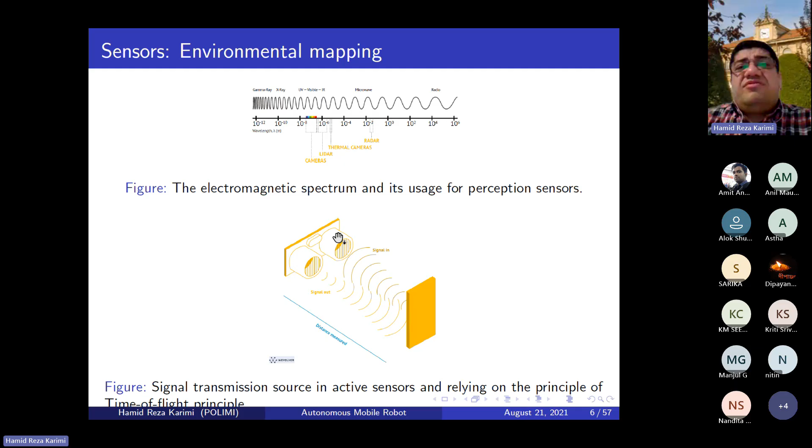But this could be the same active sensor. You can see that the sensor can send out a signal, like an electromagnetic signal, and after hitting a barrier, the signal can be reflected back to the source. This kind of transmission of the signal, you can calculate one parameter which is time of flight, the TOF principle.

It's one of the key parameters for the active sensor, in order to calculate the distance from the object. If the landmark or this point can be detected, the distance can be detected, and then the car can consider it to avoid any collision. Therefore this active sensor principle works in such a way.

So sensing the data is the main issue we have in this kind of large scale system, because in autonomous cars, the environment may be partly or even fully unknown, and the environment is dynamic. In this unknown or dynamic environment, it's very important to simultaneously build a map of the environment, and also for the robot or car to localize itself within the map. So environment mapping and localization is an important aspect for autonomous cars.

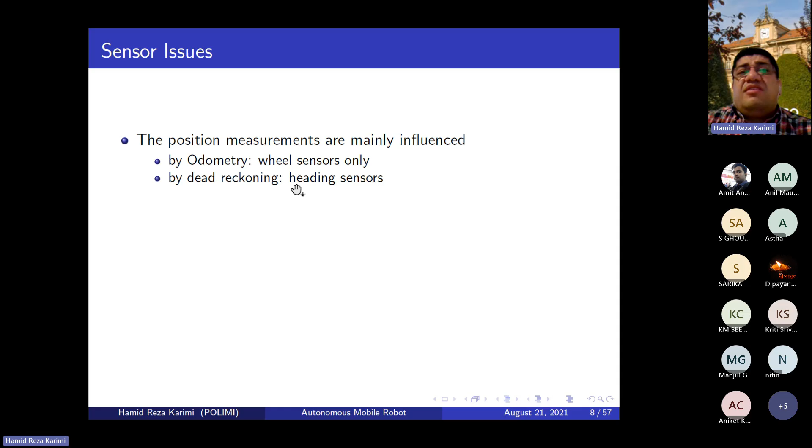It means you can get the position data from the wheel sensors, which is the odometry data information, or you can use dead reckoning. Dead reckoning means you can use some heading sensors, or you can combine the odometry and the reckoning sensors.

So the movement of the robot, because of this movement, first we can get some data from the wheels based on encoder data, and you can also use data from the heading sensors. This heading sensor information is useful for the rotation. So now you have a position, and also other information such as the heading sensors, and then you can combine or integrate it for the position estimation.

So this approach, using data from the wheels, is very straightforward and easy. But the problem is that the wheel sensor data for cars could have errors in the calculation, and could become unbounded if there are some attacks on the sensor data from the wheel.

So for vehicles and robots, if you are using sensor data from the wheels for control and positioning, if there is some cybersecurity attack, the result is not accurate, and you cannot even get a basic estimation of the position of the car.

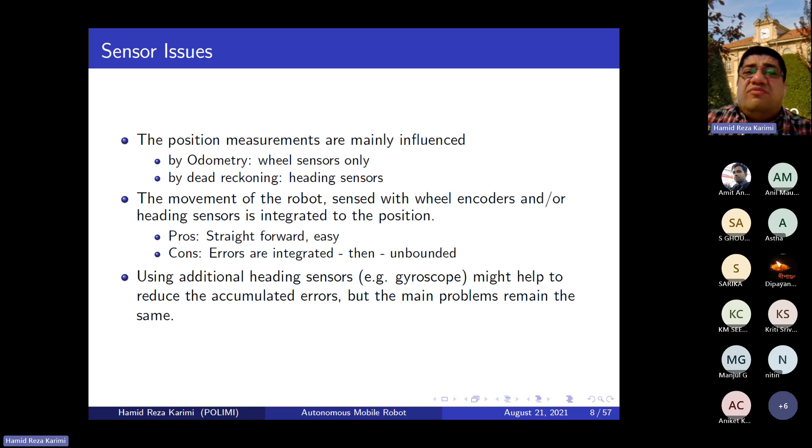In this scenario, there are some errors in your calculations. The error source could be deterministic errors, which can be eliminated by calibration - if you do sensor calibration, you can remove deterministic errors. But what about non-deterministic errors? These could also be described by error in the modeling, and always give some uncertain estimation. So these are two types of error in this modeling.

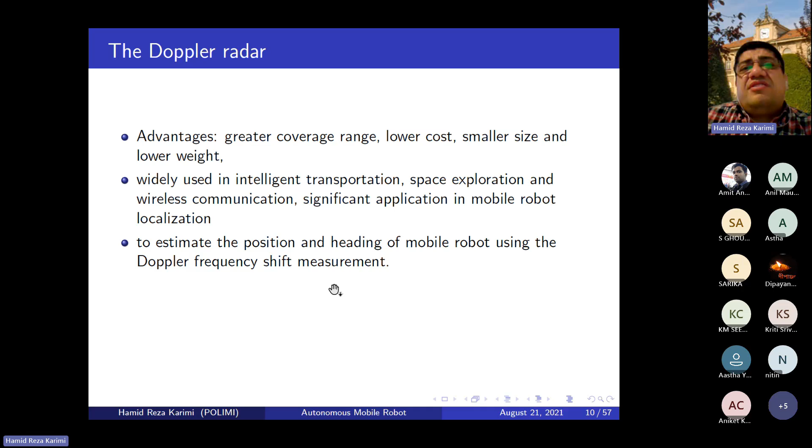We can use a Doppler radar sensor for the estimation of position and also the heading of the mobile robot, using the Doppler frequency shift measurement information. This is basically the information you can get from the Doppler radar sensors. And this information you can combine with feature-based mapping using landmarks and the Doppler radar. You can do some extended Kalman filtering, and also there are some other filtering techniques. So now you can see you can use some advanced estimation based on the information from the Doppler radar sensors, combined with feature-based mapping you have obtained, and based on some other techniques.

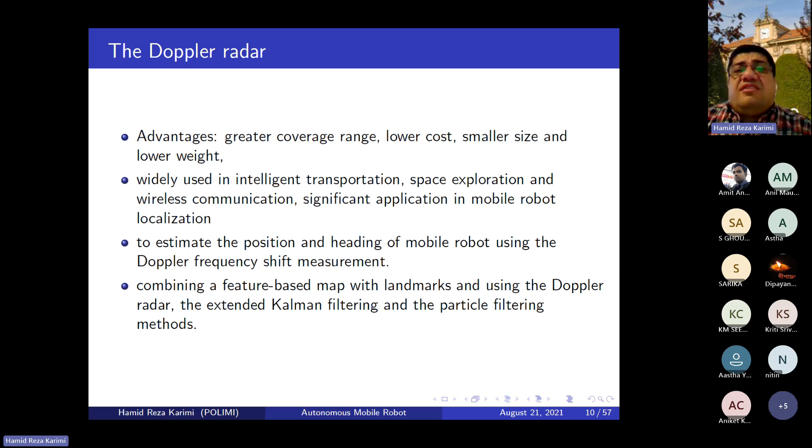Okay, so after this introduction, I want to talk about localization based on measurement outlier resistance on the network. These outliers include, for example, the fault - if the sensor is faulty, as we discussed yesterday about faults in sensors. It could also be attacks. So the outlier could be both. And the design should be resistant - resistance is the topic of the lecture from the first day. If you remember, we discussed resilient control and the CPS, the cyber physical system should be resilient. So resistance means resilient. Outlier means attacks - it could be, for example, a fault, all related to the data, the measurement. So now you can see this sentence is a topic that covers what we are discussing up to now in this course.

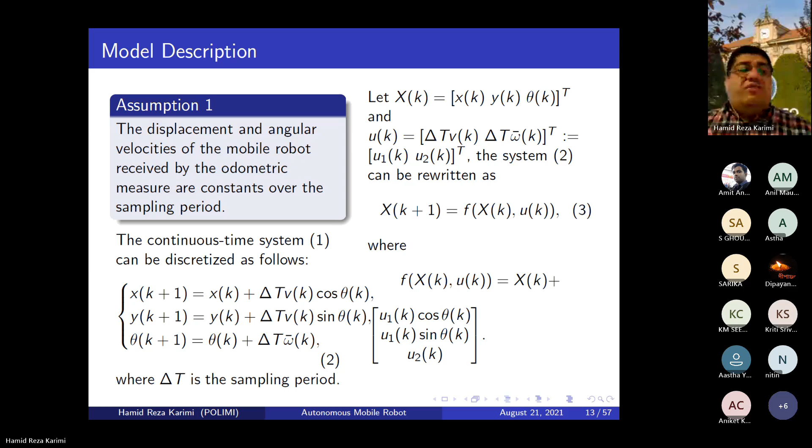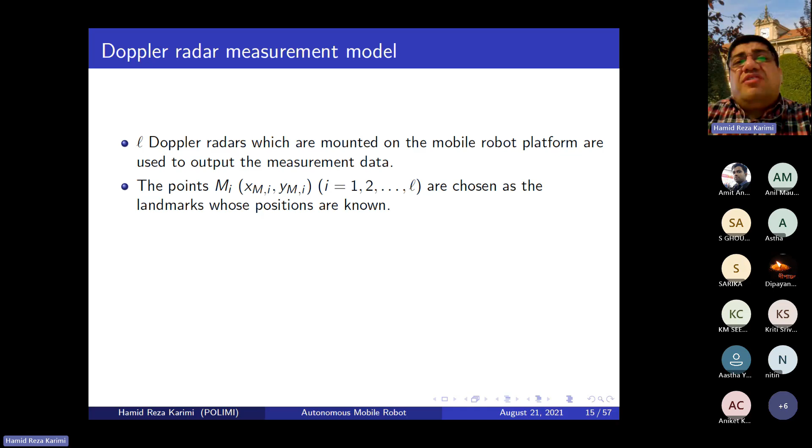Based on this information, the sensor obtains the position relative to the landmarks, and the robot starts to find its own position. So now you have sensors, and you have landmarks.

So now you need to know what the data you get from the radar sensors is. The radar sensor gives you the Doppler frequency shift data. For sensor number I, they give you the Doppler frequency shift and also the azimuth information. So these are the two data you can get from each sensor.

So if you want to see from the mathematics, at the time instant k, you have a measured Doppler frequency shift, B_ik, and also the azimuth information phi_ik. So these two, the information from the landmark I, we call the measurement.

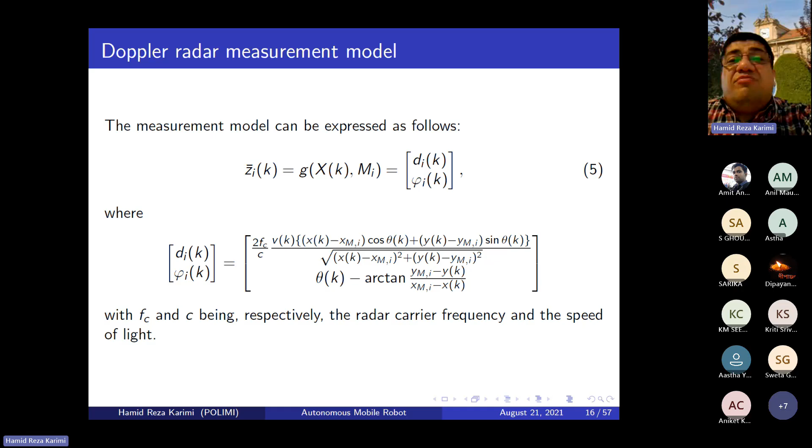I want to tell you a little bit more about the sensor data. The sensor data is a nonlinear function g, so you can approximate it like this. If you write down the sensor data like a linear term based on the Taylor series expansion, you can find this error xi_ik, and this is a linear part.

The matrix C_ik, you can calculate it from this Taylor series expansion. You take all the derivatives with respect to X, Y, and theta. This is a Jacobian matrix at the estimated xk, x hat k. If you calculate this partial derivative, I have written here all the partial derivatives. There is a lot of formulation.

And then you have your sensor data. Now this is a problem: measurement outliers. Measurement outliers in cybersecurity is a first problem, because in practical application, if there is a sudden environment change, or a sensor fault, or a cyber attack, this outlier can be produced.

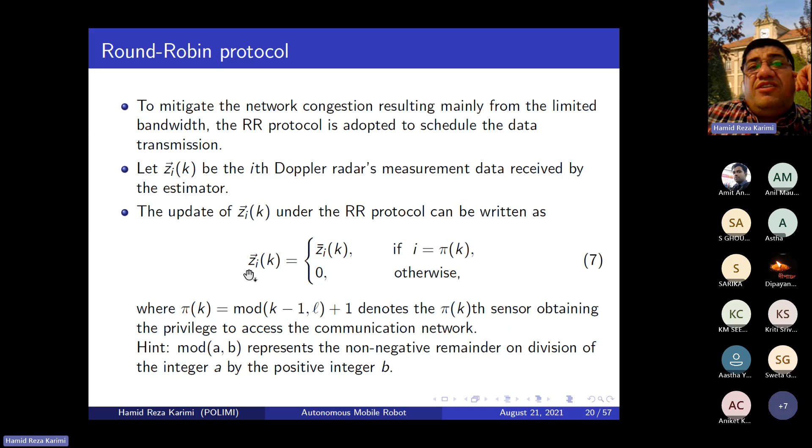So now, based on equation number 7, you have particular data at the estimator, and this data can be used for estimation. So now you have two data.

One is Z bar K—these are the data at the sensor. Z arrow K is the sensor data at the estimator.

Based on these two particular pieces of information, based on this network protocol, you can write equation number 8. Equation number 8 says what is the relation between the sensor data at the estimator received by the estimator—it has such a formulation with respect to the sensor data and the data at the sensor level. So here there is such a function, phi arrow pi k.

So this is a function, and if you write it like this, you can see that this network is very important because it affects the data you can receive at the estimator.

At the same time, this matrix, phi arrow pi k, can be represented based on this diagonal matrix term, and also this term—as you noticed before, xi arrow K—represents the error in your estimation. So now I'm talking more about this part.

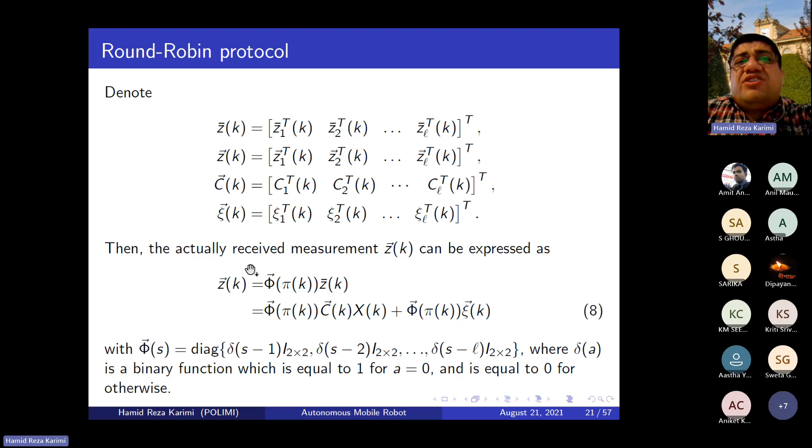This is a mathematical model for the actual received data measurement at the estimator. In equation 8, we can see that ZIK is a useful measurement data to determine the desired estimator, and the other measurements are equal to zero.

So equation number 8 increases the dimension of the measurement data, and there is a lot of computational complexity. So this equation has some drawbacks in terms of computational complexity in the real-time mobile robot.

Okay, so if you want to reduce the computational complexity, you can follow equation number 9. In equation 9, there could be some sort of representation. Based on this, we find the relation zk equals ck xk plus T psi k, and ck has such a representation. This means you can include the information of the network in your two metrics C and the function xi, and therefore equation 9 can be simplified in this form.

Now we need to introduce our estimator, for the mobile robot localization problem under the RR protocol, this is equation 10. Equation 10 is a nonlinear estimator. Why? Because x hat k plus 1 is ak x hat k, it is time varying. And if you look at the right side, here is LK multiplied by the saturation of sigma k, zk minus z hat k. This is very important.

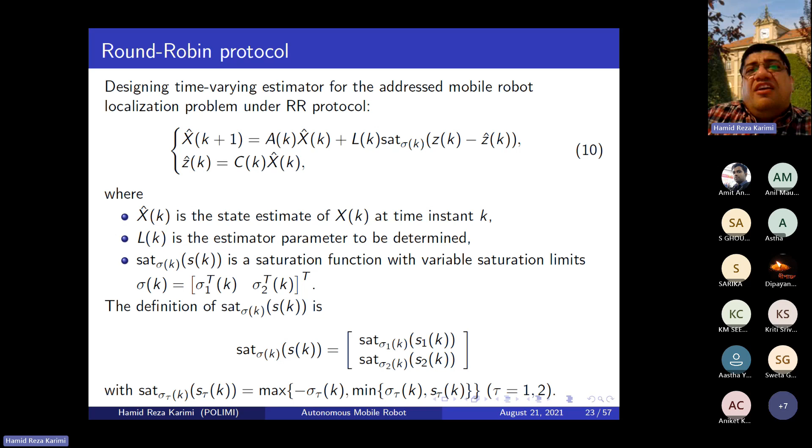Here again, sigma k, as I told you, is a variable saturation limit. It can be introduced like this. Sigma tau k comes from this mathematical formulation, but please pay attention that sigma is time varying, and this sigma bar k is time varying. It has dynamics like equation 12. It means that sigma bar k plus 1 is lambda k sigma bar k plus this information. Now you can notice that this limit is time varying, and depends on your data.

If zk minus z hat k gives you some outliers like attacks, then sigma k can be updated. Of course there are some metrics like rk or lambda k, and these two parameters you can choose by yourself. By choosing these parameters, you can tune sigma bar k in order to protect your estimation.

Okay, if you look at this mathematical model, you can see that the error signal is x minus x hat k. This error signal can be represented in the dynamical form ek plus 1, like equation 13a. Another equation is the evolution dynamics for sigma k, then you can write equation number 13b. But if you look at these two equations, it's very interesting that the vector qk contains sigma k, and xi k is the outlier information, and also some term of the saturation function like this.

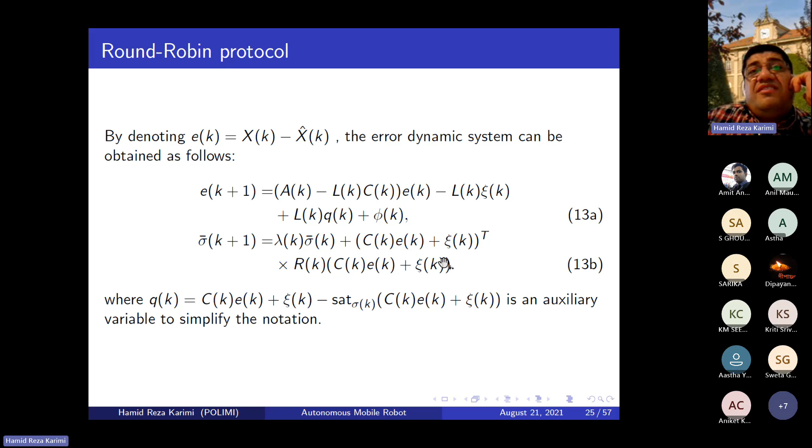So we take it in the vector qk. The vector qk exists here in equation 13a, and also in equation 13b, you have this sigma k. Now this is a nonlinear function and also time varying. Then we need to think about how to make the convergence of this estimator. There is some objective function in this design. The objective is to design a time varying state estimator in the form of equation 10 I showed you before, for the mobile robot system. More specifically, we are interested in looking for the estimator parameters L, lambda, matrix R, matrix W, such that the error dynamic system satisfies the following performance.

So this is the H infinity performance. Today there is also a course about H infinity control, but this equation number 14 is the H infinity condition for designing this estimator.

What does it mean? It means that the effect of the disturbance should be mitigated over the error signals by tuning the parameter gamma. If you choose the parameter gamma, you can see how much you can reduce the effect of the disturbance or outliers over your error signal. This performance should be satisfied by choosing the parameter gamma.

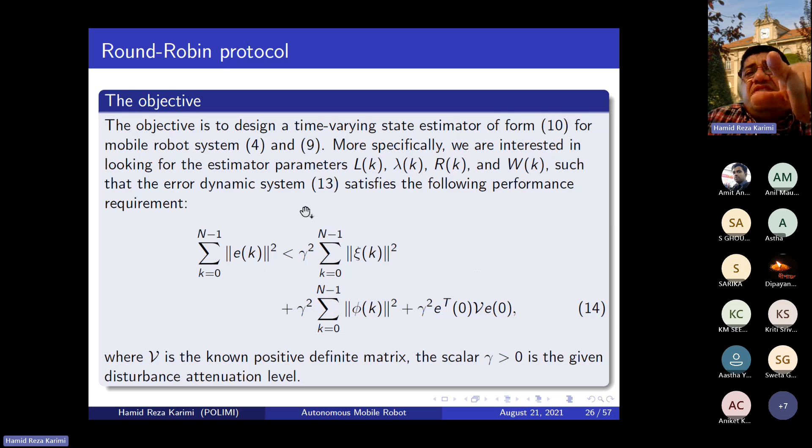The H infinity performance condition should be satisfied. I showed you before it needs this H infinity condition. So if there exists a family of positive definite matrices satisfying the following recursive LMI - LMI is a linear matrix inequality, but we have some recursive LMIs.

This should be satisfied. Matrix Xi k should be negative - this is your matrix Xi k. So this matrix should be negative, and this is time varying. We have a recursive R, and this LMI is a linear matrix inequality, but each term is represented like this, as I have written here. So this condition should be satisfied.

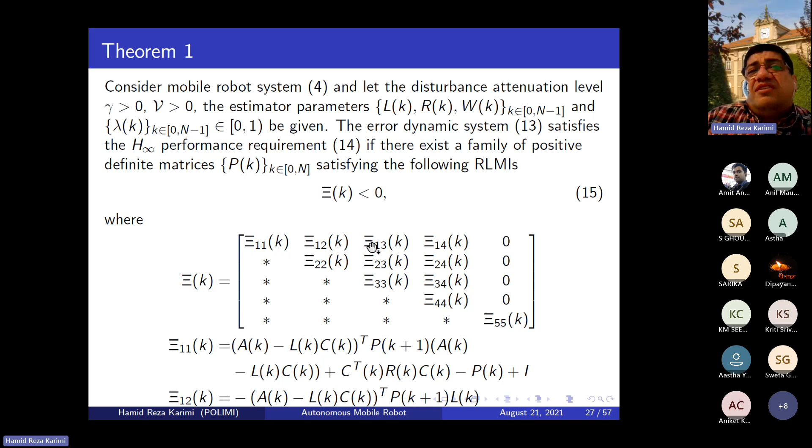How to solve it? If you learn about the H infinity condition, there is a toolbox in MATLAB - the LMI toolbox. You can write the program for LMI, then you can solve it, and it's not so difficult. Then finally you can also satisfy this condition for the initial condition, and finally you can obtain the result.

So the second part - this was about the satisfaction of the H infinity condition, but now I need to show you how to design the parameters, because you need to find basically the observer gain. So again, for the same strategy, there is another theorem.

It says that if you solve this LMI problem number 16, there are some LMI variables like the matrix PK, matrix K, matrix R, matrix W, and also the parameter lambda. If there exists a solution to this recursive LMI, then you can obtain the LK.

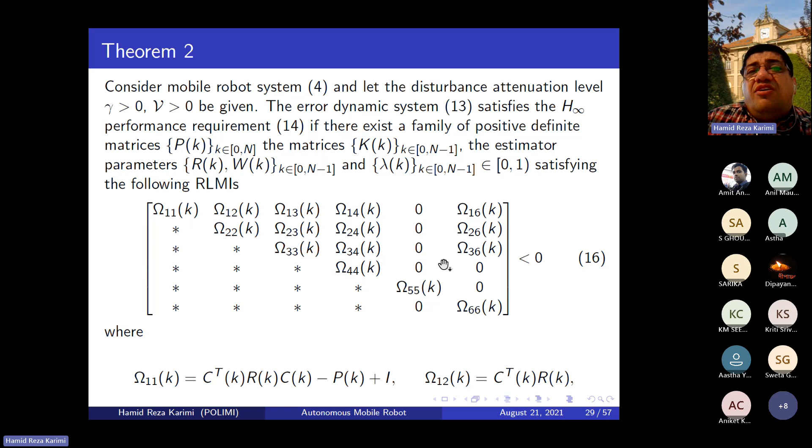So now the conclusion is here. The state estimator parameter lambda LK, you can calculate from this mathematical model. You can see that LK can be calculated from the matrix P inverse multiplied by K. So both K and the matrix P are the solution of your LMI.

It means the LMI should be solved at each iteration. At each iteration, you can find a new L, because L is time varying. And then you can design your time varying estimator.

So there is an algorithm to solve this problem. First, we need to give some initial conditions, like the H infinity performance gamma I told you before, and there are some initial values for the LMI variables.

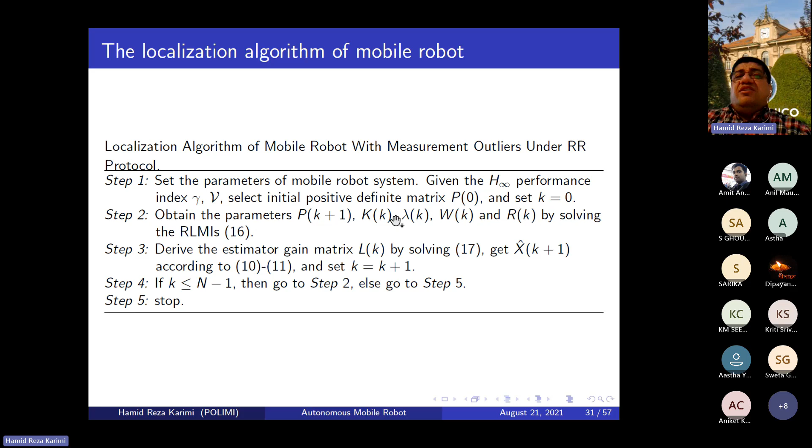Then you need to solve this LMI number 16 in the recursive form, and obtain all of this information. When you obtain this information, you can calculate L - I showed you before, L is P inverse multiplied by K. Then you can repeat it, basically, to get the estimated values.

Let's discuss a little bit about the case without measurement outliers. Here I talk about outliers like cybersecurity attacks, but if there is no cybersecurity issue, sigma goes to infinity. If sigma goes to infinity, it means you don't have any attacks.

You have seen this in other courses. When you design this estimator like a Kalman filter or a Luenberger observer, if you avoid this saturation term, it means you have this mathematical model - mathematical model number 18. It means that sigma goes to infinity just in the case where there are no outliers.

So, okay, and you know about this, and that's it. I can repeat it again.

For this particular case, you can also develop the error signal and its evolution dynamics. You can see there is no evolution for sigma because sigma is infinity. But you have this H infinity condition, which means you need to satisfy or mitigate the energy of the disturbance over the error signal. So this problem is relatively simple because there is no sigma.

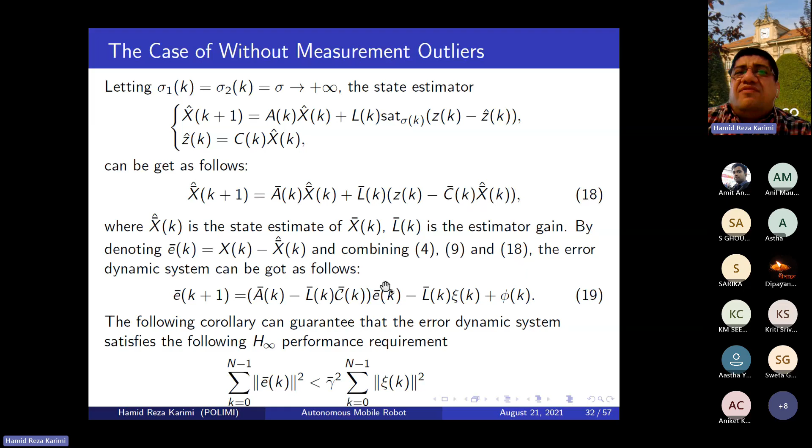This is only the time varying estimator. The same theorem can be adapted for this case, but it is very similar to what I proposed before.

Now I want to show you some simulation results. Let's assume we have a simulation for 300 samples, for the horizon N samples, and there are three Doppler radar sensors on the mobile robot.

Let's assume the robot should follow some particular position. For this sampling time, the speed should be 400, and also the angular velocity should be this value. For this other time, the robot should follow the speed of 400 and this angular velocity. It means we can give some particular set point, so the robot should track this information. These are the initial conditions for this problem simulation.

Because you have three sensors, you have three landmarks, N1, N2, N3, and all the information is given. Then you can start with the initial values for the evolution dynamics of sigma k, and this is a starting point for your LMI, basically solving the LMI.

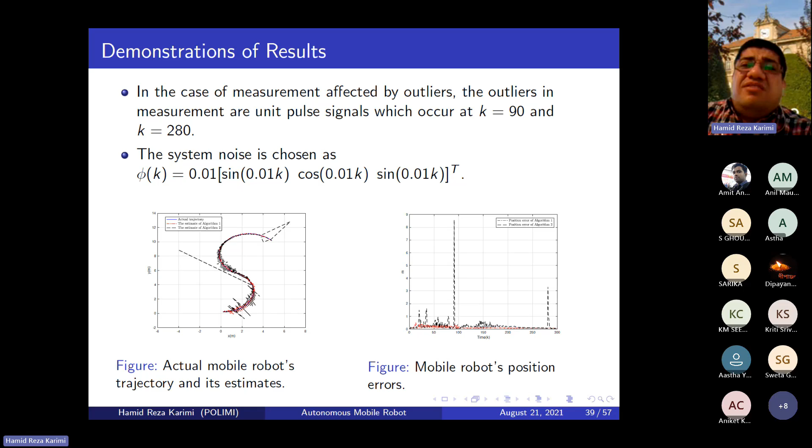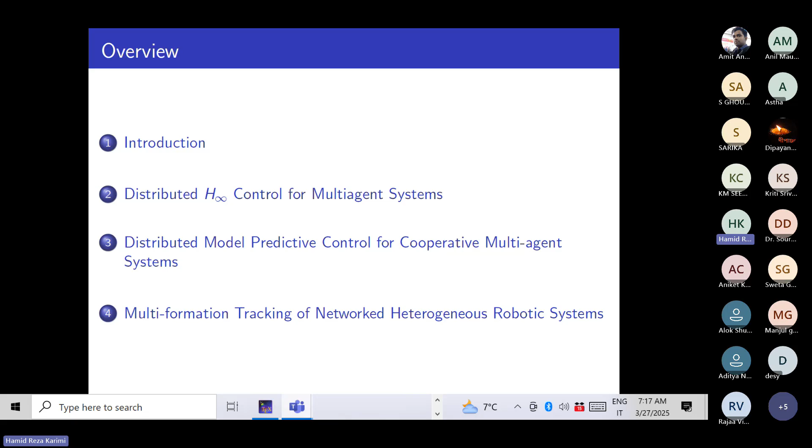So the first introduction: we know about network control, the history of control comes from analog control to the centralized digital control system, as we discussed before in the context of network control. We have the topic of decentralized control, and this was the starting point.

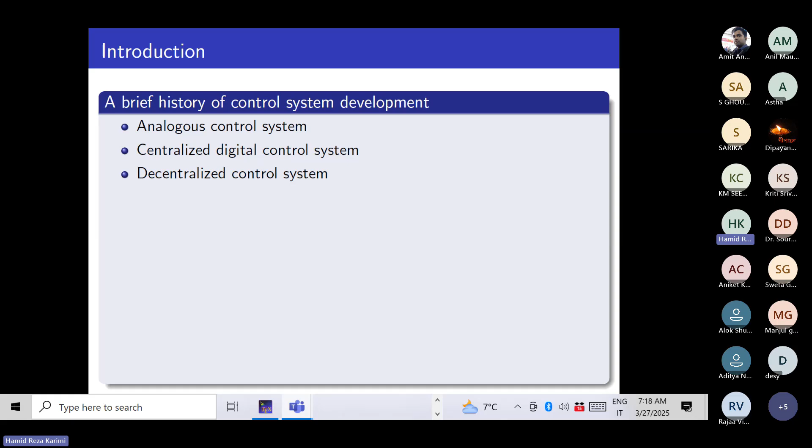In decentralized control, we notice there are some basic advantages in handling the system, but there could be some issues from the network side. And therefore, the distributed control system, DCS, was introduced as a potential application to manufacturing process control.

In DCS, you have two parts: one, networks for communication and monitoring. Then you look at the network complexity, which is a challenge we have in distributed control.

So the fieldbus control system, FCS, was introduced after DCS, and then ICCS is an integration of control and communication in 1988, and then network control in 1998, and then coming to the CPS. In CPS, control, actuators, and sensors are integrated with digital blocks evolving according to discrete events as a cyber system. This integration of components can introduce the CPS. So these are the developments of the control systems.

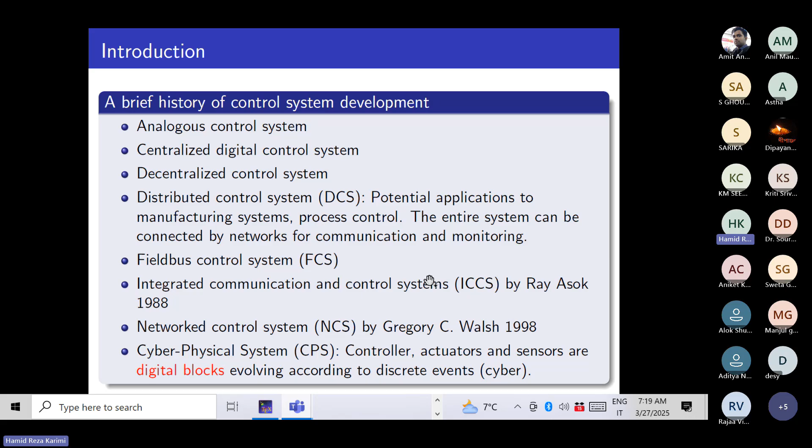So that's it, we are talking about the network. We talked about network control as a complete distributed system, as we also discussed in previous lectures. You can use this structure also for estimators, but there is some integration of sensors, controllers, and actuators.

But you should think about different configurations. You see that the data will be sent over the networks. You can also think about a distributed filtering system, where you have a target plant, sensors, filtering, and then you get some error signals.

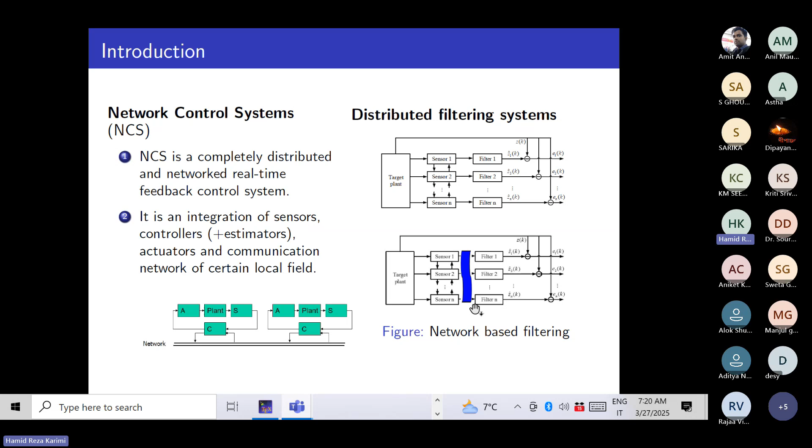If you want to take it to network-based filtering, you need to send your sensor data over the network. So in both cases, the network control system and network-based filtering, there are issues about the networks and a lot of complexity, and in this course we always talk about the complexity of the networks.

We notice that in the network there are issues about time delay, packet disorder, packet dropout, and quantization. This could produce a nonlinear physical plant. So if the network is considered, the system becomes totally nonlinear, and there could be challenges with classical control theory.

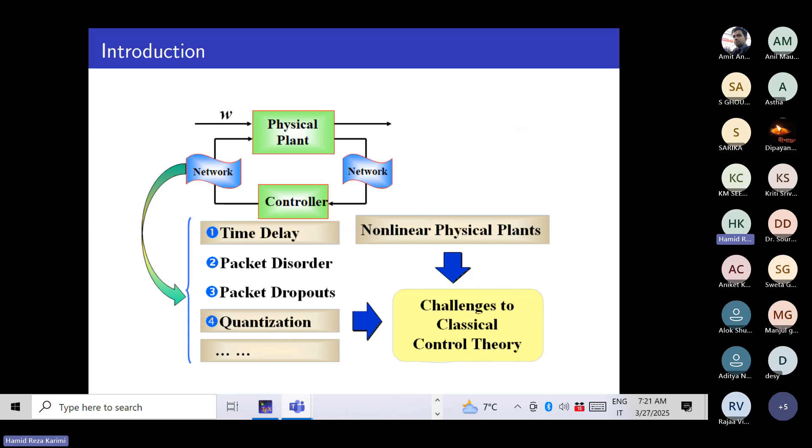That's it, it's difficult to design the control. So you need to learn how to deal with this complexity in control theory and how to design suitable control methods to deal with this problem.

Another topic I want to introduce from CPS at a larger scale could be the context of the multi-agent system. Multi-agent systems consist of multiple agents, with several sensors, actuators, and the capability to communicate with each other.

In the context of multi-agent systems, you need to look at the data from the sensors, how the actuators react to the sensors and controller, and all the communication between the agents is through the networks.

There are several applications for multi-agent systems, like automated highways, emergency patient transportation, air traffic control, satellite formation, robotic formation, and flight formation. So you see there are so many possible applications for multi-agent systems.

One interesting application to discuss is the multi-agent system in intelligent manufacturing, using the cyber physical system architecture to integrate production and quality control in a multi-stage production line. You see there are many stations, station number n plus one, and so on, each integrating CPS in terms of machines and operations to produce material.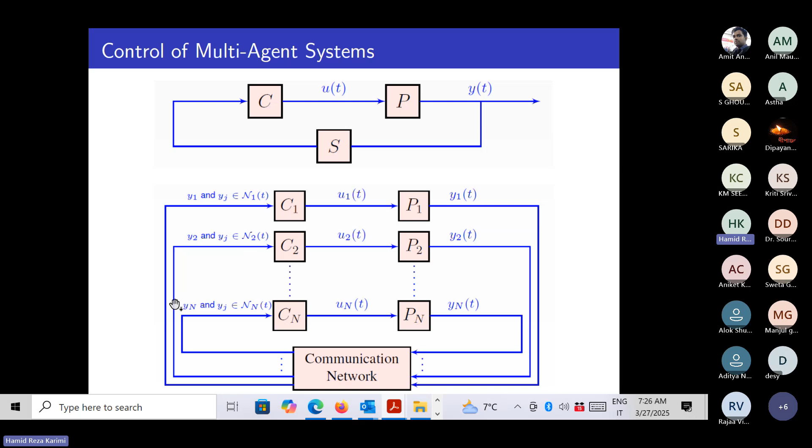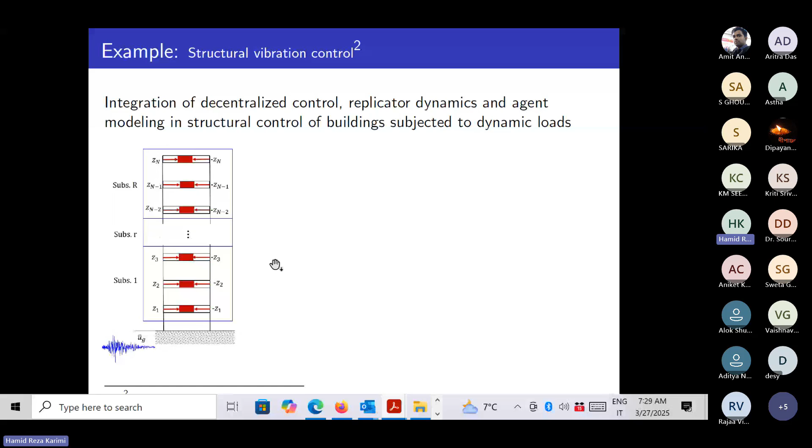Each subsystem has some neighbor systems, which we call the floor or story. So if you want to control subsystem R, you have the information YR, maybe the position of floor number R, but there could be some other information from other subsystems. The point is that for controlling subsystem R, you can design some advanced control. For example, you can take the YR data to this control agent, and the control agent can basically design the control for this subsystem R.

So maybe you can follow some idea from multi-agent, such as the replicator dynamics. It means that you can design some control based on the local information and also based on the neighbor information. And this is the task in the multi-agent.

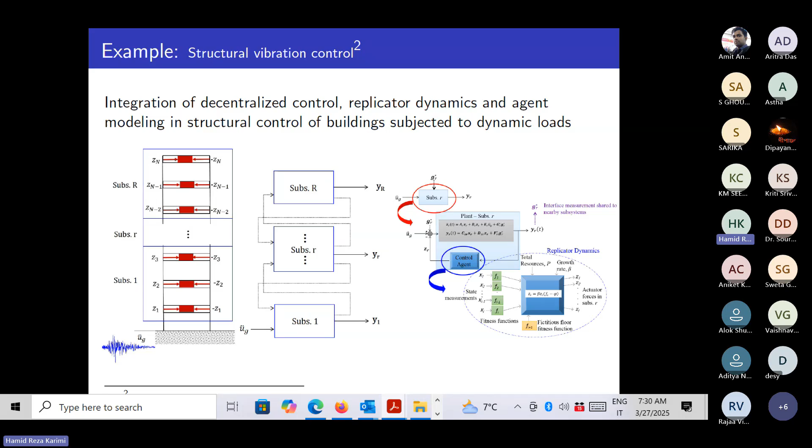You need to look at your data. So the control of the multi-agent from the theoretical point of view, you have many subsystems. Some individual subsystem, they can only access the information of their neighbor because of the communication constraint. So you have some limitation over the data from the neighbor system, and therefore the system has to be controlled by a distributed control protocol.

So we call it the nearest neighbor rule. So these neighbor information can be taken into account, and all the agents in the group should have a common objective. So in the multi-agent, all the agents have a common objective, leading to collective behaviors, and the global behavior of the system is jointly dictated by the system dynamics and the communication topology. So now you see that the total behavior of the multi-agent system depends on the network and also depends on the dynamic of the agents.

So the basic control problem for the multi-agent is consensus. Consensus is a basic problem, and maybe I'll talk more about this today. For the consensus problem, you could realize it based on the leaderless consensus problem. It means that there is no leader, there is no external information, and then the output of all the agents of the multi-agent system asymptotically approach a common trajectory via distributed control law. There is no external information, and the output of each agent should asymptotically approach a common trajectory based on the control design.

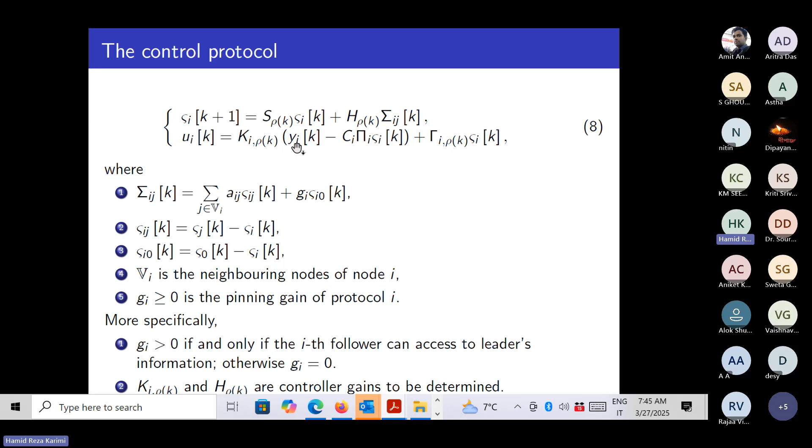The matrix K and matrix H are the control gains you need to obtain. So the control gain is matrix K, matrix H, and these should be calculated. The other parameters are design parameters, and basically you don't need to calculate them, just Ki and H rho K. The other parameters, like matrix pi I and matrix gamma I rho K, are the assumed solutions to the following regulation equation.

So here we have some algebraic equation, and these two matrices - shown here in red - can be obtained by solving this regulation equation. You can obtain pi I and rho I, gamma I, rho k.

For solving the control problem, we should also assume that the rank of this matrix should be such that, in order to be able to solve equation number 10, this rank condition should be satisfied. So now the problem is: how to find K, how to find H - that's it. I'm trying to explain it in more detail.

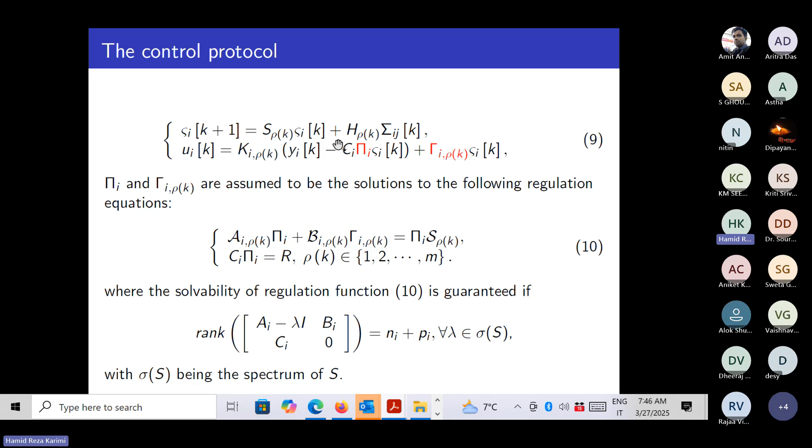So the problem is to design the output feedback control. This means that because here you have information yi K for the sensor for agent number I, you need to design the output feedback control.

The output feedback control says that if K goes to infinity, the error vector - the norm of the error - should go to zero. And if there is an omega, the disturbance, when it's zero... if the disturbance is not zero, you can look at some initial conditions like this, and then the H infinity condition should be satisfied. It means the energy of the error signal over the energy of the disturbance should be bounded by gamma - this is the H infinity condition we need for solving this problem.

In this output feedback control, you need to remember there are some signals like the error signal EIK, which is the difference between the output of agent I and the leader, and T psi IK can be calculated from this mathematical formulation. Based on this representation, you can find equation 11. But equation 11 still contains matrix K and matrix H - the gains K and H - which you don't have, you need to design them.

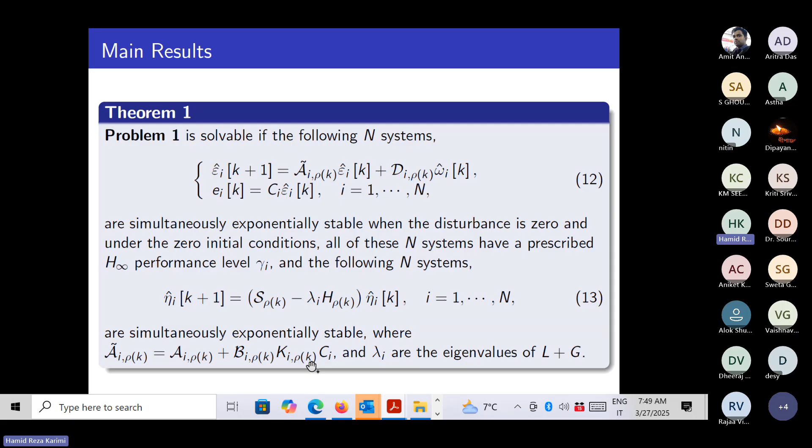In this case, remember that in matrix A tilde, the control gain Ki also appears. So in total, you can see that H and K appear in equation 13 and equation 12, and now the task is how to calculate these two parameters.

We have proposed some theorems. For example, this theorem says that for a prescribed H infinity level gamma I, if you solve this linear matrix inequality, like number 14, along with some condition equation 15, and also some condition over the average dwell time TA.

The average dwell time TA should be bigger than this value. If these conditions are satisfied, you can guarantee the exponential stability of both systems, meaning both conditions can be satisfied.

More details can be found in the reference I gave you in advance, but I just want to show you the main idea.

In this theorem, remember we introduced the switching signal rho tau. We assume that for the time between the two time instants k0 and k, n rho is the number of switchings of rho tau over this time period. If the number of switchings n rho is less than this condition, we call it the average dwell time, or ADT.

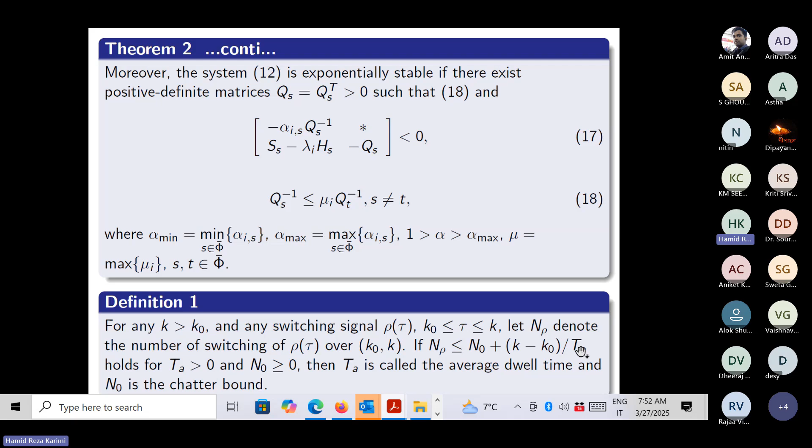We also propose another theorem for solving this problem. It says that if we want to design the control, and the average dwell time TA is bigger than this, and some conditions are satisfied for each agent number I, then you can calculate the gains of the controller, the output feedback control, from these two mathematical formulations.

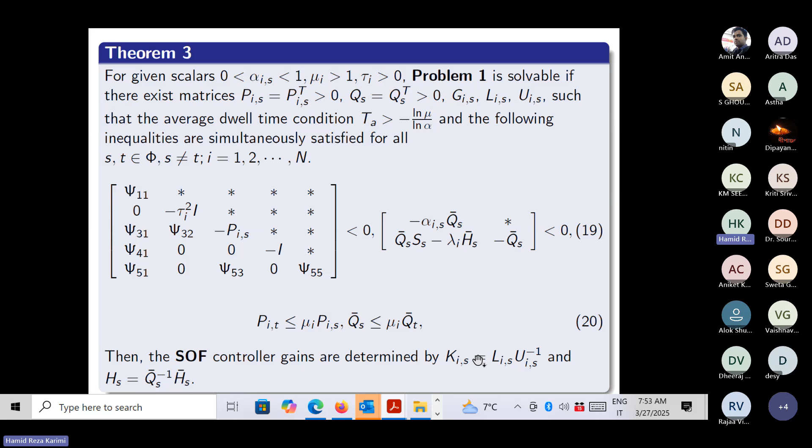In these two mathematical formulations, you can solve the problem of output feedback control by finding these unknown matrices from LMI. So you need to solve the LMI. By solving this LMI, you can find L, U, and other parameters, then calculate these two gains.

About the simulation, I'll show you a very simple example. Assume there is a leader O and 5 agents, and the followers use sample data of the position information for control design. Each agent can be modeled with double integrator dynamics with different types of actuator models, and this is the model of each agent.

Each agent has different parameters A, C, D, and these form the vector F, which represents the dynamics of each agent, 1 to 5. Then there are two matrices, S and R, which represent the leader dynamics. So now you have a model for agent I, from 1 to 5, and also agent O for the leader part. These are the sums used for simulation.

We choose different parameters A to E for each agent from 1 to 5. Here we take the sampling process as non-uniform, and the sampling period is taken from a set.

Remember that the sampling period was important because the next time instant of the agent is based on parameters like 0.1, 0.2 seconds. Based on these parameters, you can see the sampling period is non-uniform - agent number 1 can take different sampling times, and therefore this process is non-uniform.

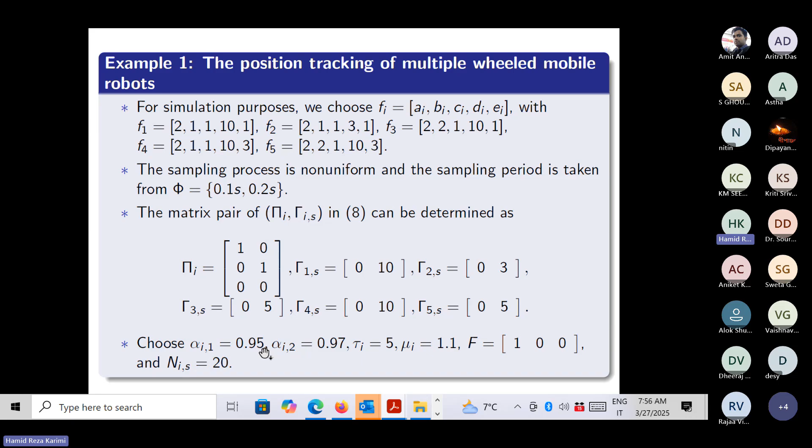When you solve the LMI toolbox in MATLAB, it gives you these control gains, K11 to K52. It means all the agents, basically the gains. For the output feedback control, you can obtain it with the two matrices H1 and H2, from the LMI toolbox in MATLAB.

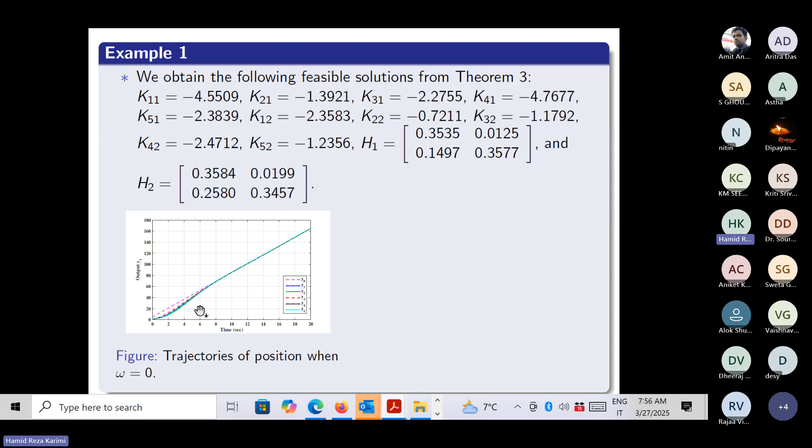This picture shows the trajectory of the position. When there is no disturbance, you can see that all the agents - the red dashed line is the Y0, the leader information, and the others are the agent information. So you see all the agents can follow the leader information, and this means a consensus problem, the tracking.

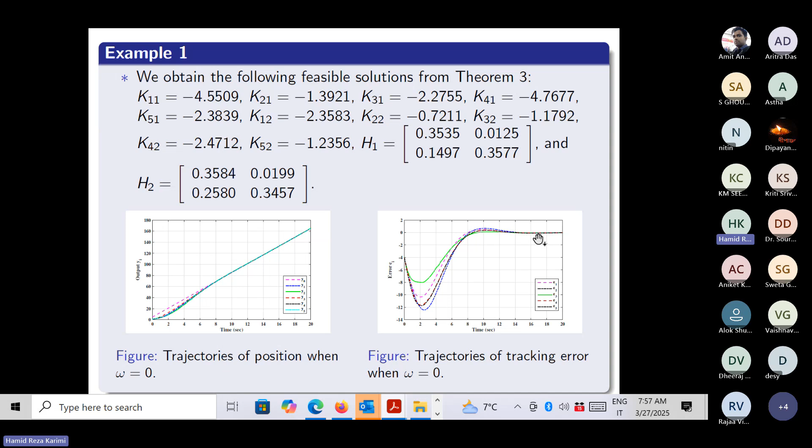And this is the error tracking, you see. After maybe 8 or 10 seconds, all the agents can reach the error, it can approach zero, and this means that the tracking is satisfied.

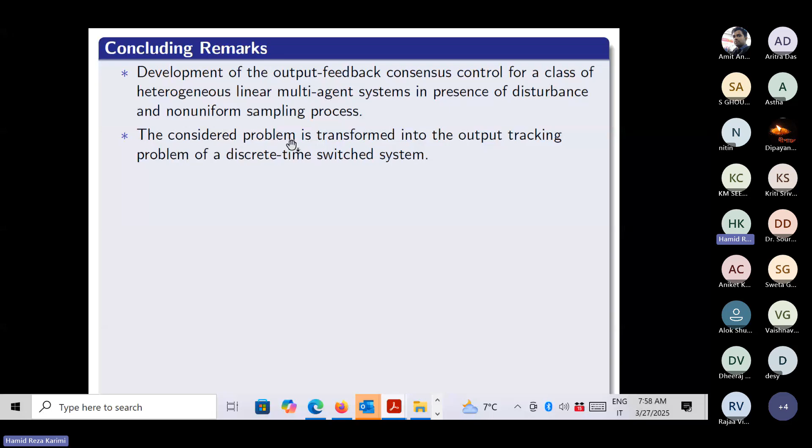In the first part, I introduced the output feedback consensus control for the class of heterogeneous agents in the presence of disturbance and non-uniform sampling. We look at some output tracking problem based on the discrete time switched system, and this theory is based on Lyapunov theory. You can guarantee that you can find some sufficient condition for stability.

Of course this is the output feedback problem, and the output feedback problem is a non-convex optimization problem. But in this publication, we try to solve it based on LMIs, and that's it. This result is important.

The next part, I'm going to talk about the effect of networks, about event-based control, and to show you how you can design some advanced control, such as distributed MPC, the model predictive control. Tomorrow I will talk about MPC in more detail with the basics, but today I also try to introduce you to MPC.

This result you can find from this publication. If you go to publication number 4, you can find the source of this presentation, this article.

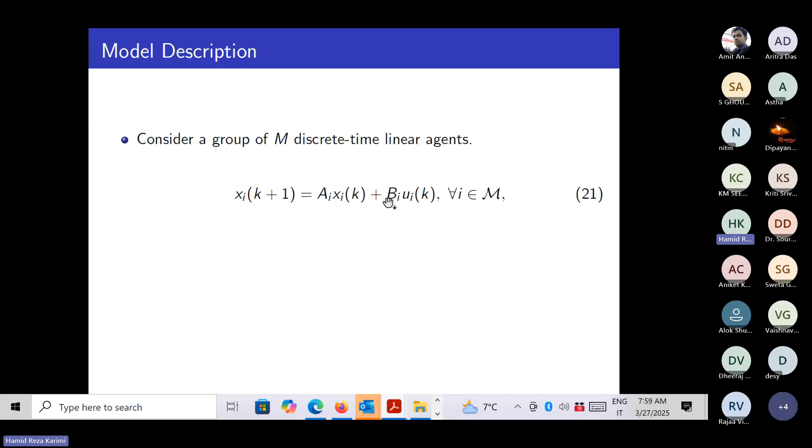Here we have a group of M agents. We can see again that agent I is a heterogeneous agent, it's linear with the dynamic XI and also the control signal UI. We assume that AI and BI are controllable or stabilizable, and also that agent number I can receive information from at least one agent J.

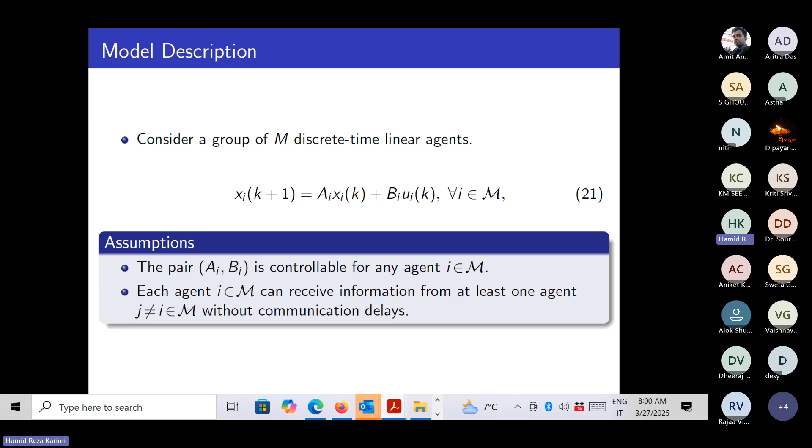Without communication delay, it means we assume that agent I can receive information from another agent, or major agent, without any delay. For each agent I, we assume that the cost function is solved at any triggering time instant TIR.

Now I want to introduce one topic as self-triggering DMPC, which is distributed model predictive control. It means that if agent I basically receives, they should minimize one cost function at any time instant TIR.

You can define the cost function like equation 22. This cost function is a quadratic cost function. It has two parts - one part is the network effect, because this is the cost of the networks, and by changing gamma I, you can control the cost of the networks. There is another cost function, JIC.

So JIC is for the performance cost function. And therefore, we can define this total cost function JI based on JIC from this mathematical model.

Here you can see that TI is the difference between two sampling time instants, and this is the triggering time. It means that TIR is the current time instant, and the next triggering time is TIR plus one. So the question is how to find this, because you need to know what is your TI, the time period, and remember that TI appears here in the network cost, and therefore this network cost should also be minimized.

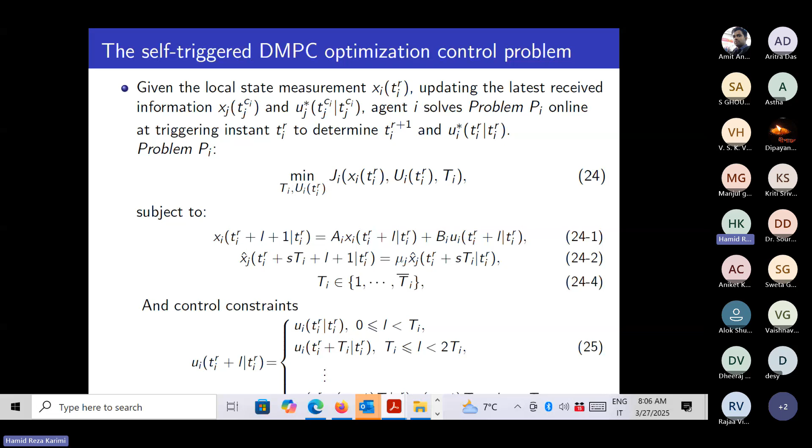So we propose one algorithm called the self-triggering DMPC. In this case, there is offline calculation and online processing time in real time. For the offline part, you need to set some initial parameters, basically for solving this condition of this research. And then there is some online calculation.

For agent I, agent I should do some estimation of the other neighbor agent over the horizon L, and based on this estimation, agent I should solve this problem P tilde I. This problem has been introduced just to obtain Ti star, the value of the time interval for agent I, which should be defined from the minimization of this cost function over Ti. If you solve this online processing, you can obtain the control signal from this mathematical form.

So the control signal has two pieces of information: the gain for the local information, and another control gain with respect to the state information of a neighbor agent, since agent J belongs to N_i. So briefly, if you follow this self-triggering DMPC, you can obtain two pieces of information: the next control signal, and the next time instant T_i_r plus one. These two pieces of information can be used for the self-triggering DMPC.

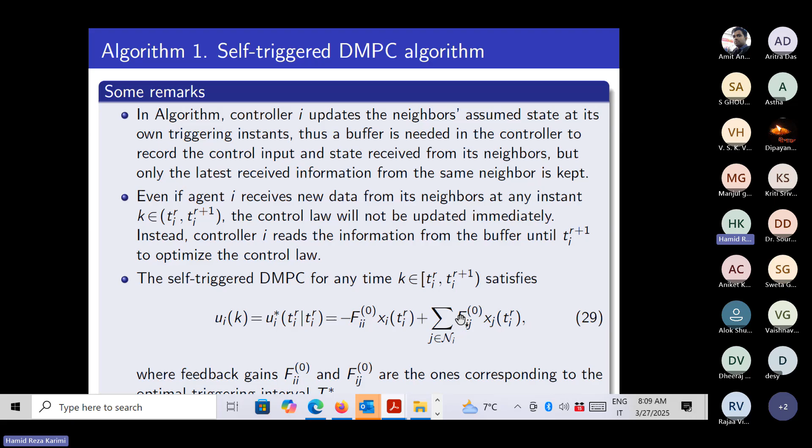We also propose one theory for stability. It says that the stability of the whole system can be guaranteed based on this condition, and of course this can also be proven.

So for your information, the stability proof is Lyapunov-based. By choosing this quadratic Lyapunov function, you can guarantee the stability. This means that the agent asynchronously and aperiodically updates the control input and broadcasts the current information. So the Lyapunov-based approach has been used for the stability proof.

For simulation, you can choose maybe one leader and four robots with this information. The robot we look at is a manipulator, and it has some DC motor for actuation, and a rigid link. There is a rotation angle Q_i, and a mathematical model can be written for this actuation part.

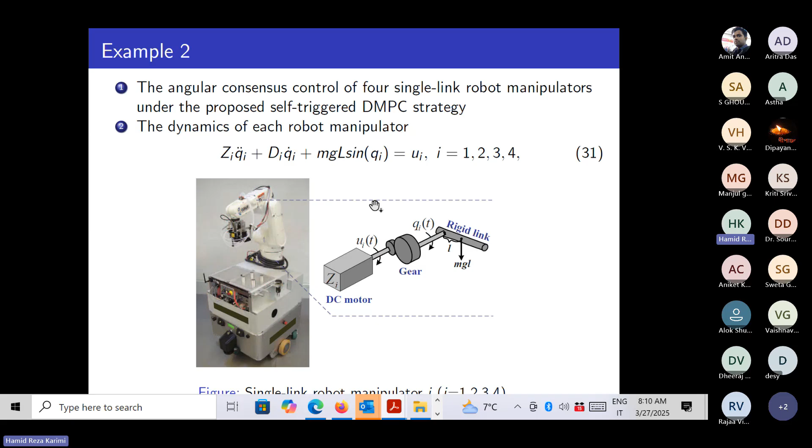Notice that this model of the manipulator is nonlinear, but if you linearize it, you can find a linear multi-agent model. After linearization with this sampling time, you can find some linear equations for this multi-agent system. Now you can think about it like this.

For controlling this multi-agent system, you could take some neighbor sets for each manipulator. For example, for agent number 1, the neighbor agent is number 4. For agent number 2, the neighbor is agent 1. For agent number 3, the neighbor is agent number 2, and for agent number 4, the neighbor is agent 3. This means each agent can receive data from its neighbor agent.

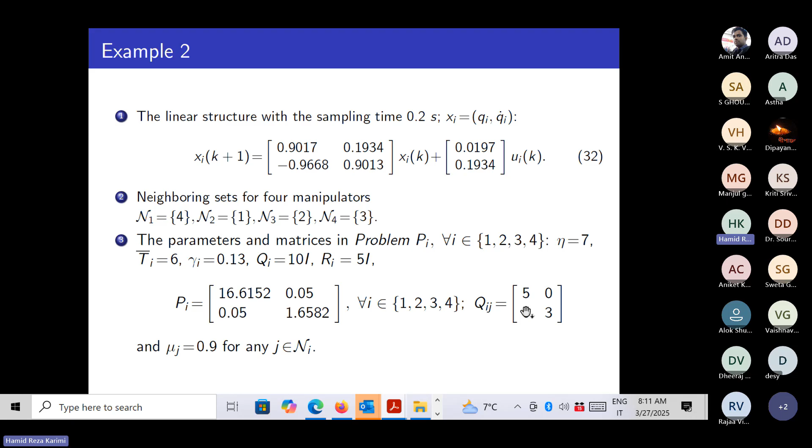Now you need to solve this algorithm for the self-triggering DMPC. By solving this problem PI, you can calculate this information from the algorithm. So if we look at the result, you can see there are four basic plots.

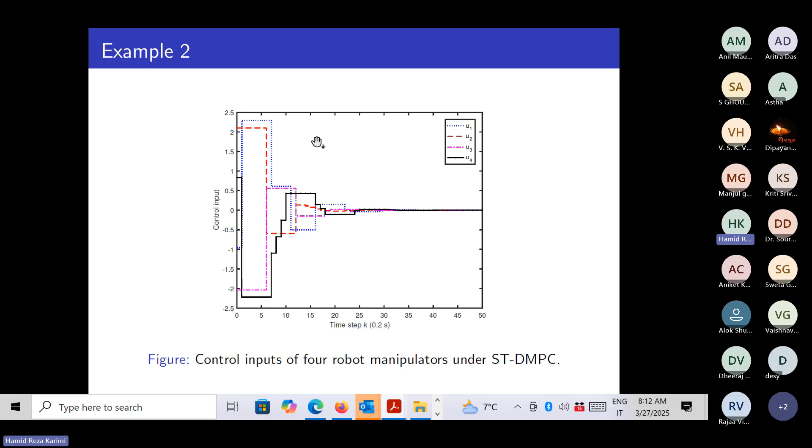You might want to know what the benefits of ST DMPC are, but I can show you later. These are the control signals for agents 1 to 4. You can see that all the control signals can be updated at different time intervals, and this control signal is based on the self-triggering DMPC.

These are the triggering instants of the 4 robot manipulators under the ST DMPC. From agent 1 to 4, you can see at which time the control can be updated. So based on the ST DMPC, you don't need to trigger the agent at any time. There is some particular time you can obtain from the optimization of the MPC.

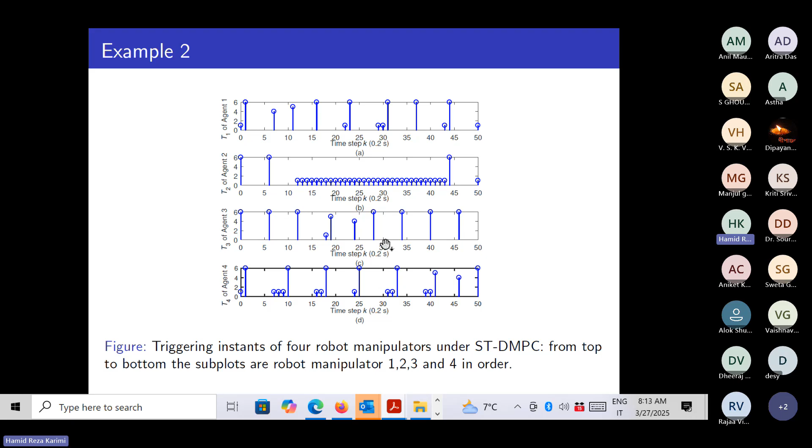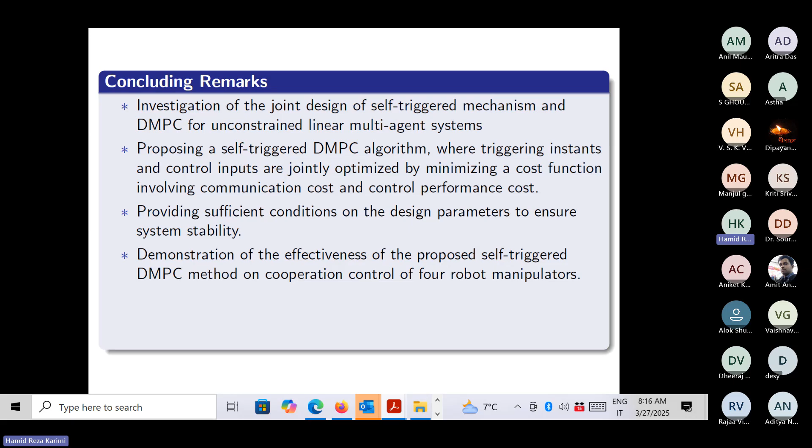So here I try to introduce self-triggering DMPC for the unconstrained linear multi-agent system. We notice that in DMPC, the triggering instant and control inputs are jointly optimized by minimizing the cost function involving communication cost and control performance cost. We could provide the sufficient condition based on the design parameter to ensure system stability, and also demonstrate the effectiveness of the proposed self-triggered DMPC method on cooperation control of four robot manipulators.

For the heterogeneous robotic system, we have N robots. And the robots have some assumptions on the graph - basically it means that these robots follow a particular graph. This graph is a directed graph with several parameters.

Another piece of information is the edge EIJ. Basically, if it's in the set, it implies that robot I can directly receive information from robot J. Another thing is that AIJ in the adjacency matrix is positive if robot I cooperates with robot J, and if AIJ is negative, it means robot I has some competition with robot J. So positive or negative means cooperation or competition.

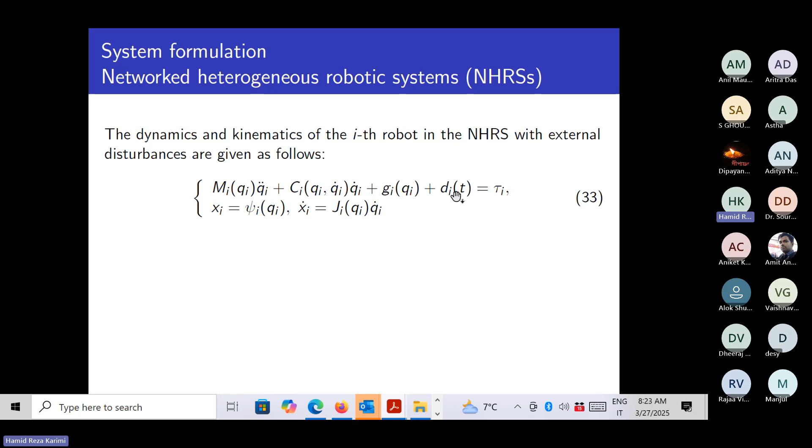In this network heterogeneous robotic system, we try to introduce the dynamics and kinematics of this NHRS. Here this is a nonlinear function, based on the inertia, centrifugal forces, gravitational forces, disturbance Di, and we have a torque tau I. These xi and the velocity are the kinematics.

There are some uncertainties in the inertia, centrifugal force, and gravitational terms, like delta mi, delta ci, delta gi. But if you put it together, you can find equation 34, which basically consists of the nominal values for all the parameters of the robot.

On the right side you have an actuator, meaning you have a control signal tau I, and the fi(t) disturbance is also added here. We assume that this disturbance or uncertainty satisfies this condition.

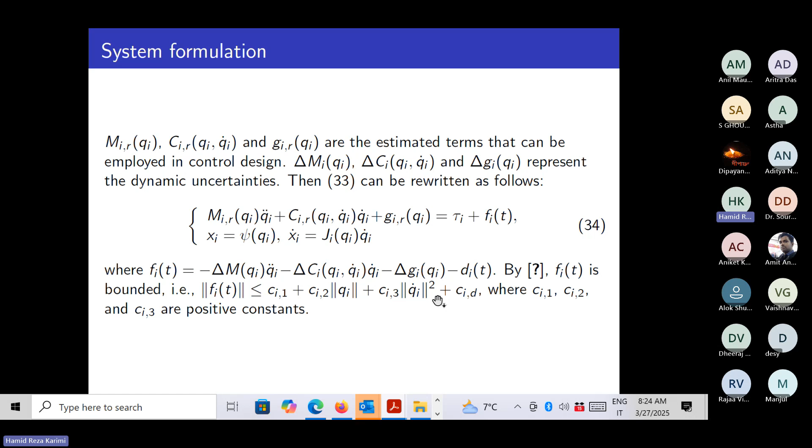At the same time, the velocity of each agent I in group number L, VI minus the virtual velocity for the leader of group L, should also be regulated.

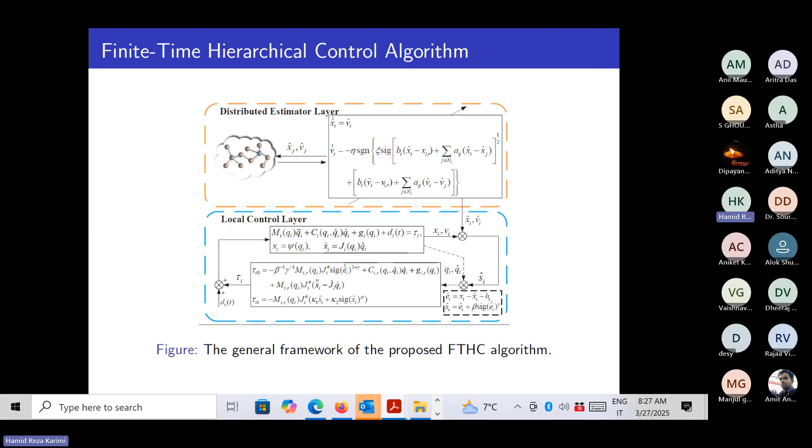The control is based on the sliding mode control. By design, we want a sliding surface, an error signal, and then we have designed another sliding mode control. This sliding mode control gives us the input signal tau I. So the control signal we have designed is based on the sliding mode observer and sliding mode control.

Okay, so in terms of the observer design or estimator based on this sliding mode estimator, we have a proof that this estimation error can converge to zero, and also in a finite time. So this has been guaranteed, but I'm not going to show you the proof. If you are interested, you can look at the publication.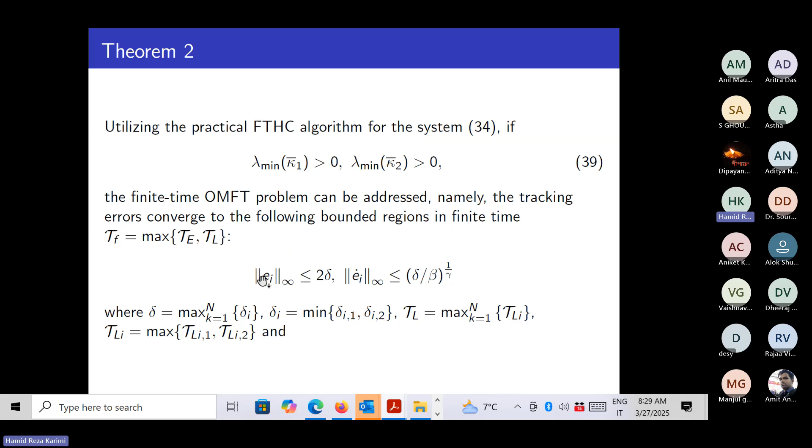In the simulation result for this network heterogeneous robotic system, we have 11 agents, and these 11 agents can be partitioned into 3 groups: group number 1, number 2, number 3.

In this group, L1, L2, L3 are the virtual leaders. You can see that there are some parameters, either positive or negative, meaning either collaboration or competition between the agents. So the agents have 2 different models, either the robot with 2 degrees or 3 degrees as a redundant robot.

So here we have a particular model of the robot. For the 2 degrees robot, we have this information for the mathematical model of the robot, for the inertia and other parameters. We also try to follow some estimated values corresponding to physical parameters for the robot, and we can obtain this.

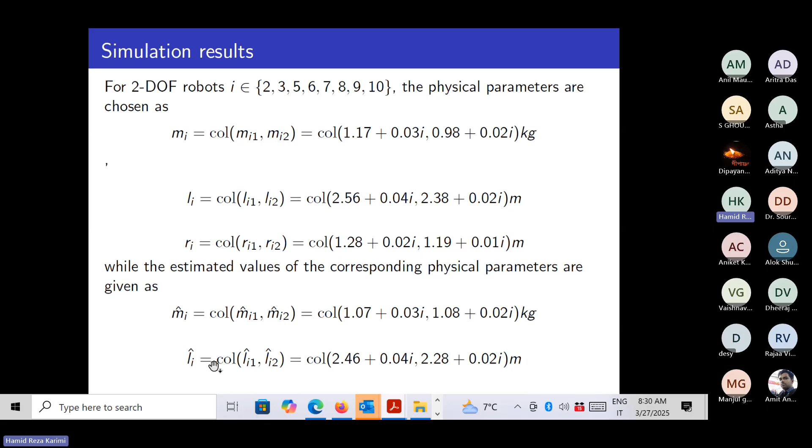And for the 3 degrees robot, for example robot number 1, 4, 11, we can also use this parameter for the simulation part. The corresponding estimated values of this parameter of the robot we obtain like this. Okay, so these are the parameters of the model of the robot.

Then we can see the leader information, because there are 3 groups. For group number 1, you can give this virtual leader information: position, velocity, acceleration. Same for leader number 2 and leader number 3. Okay, now you have the leader information.

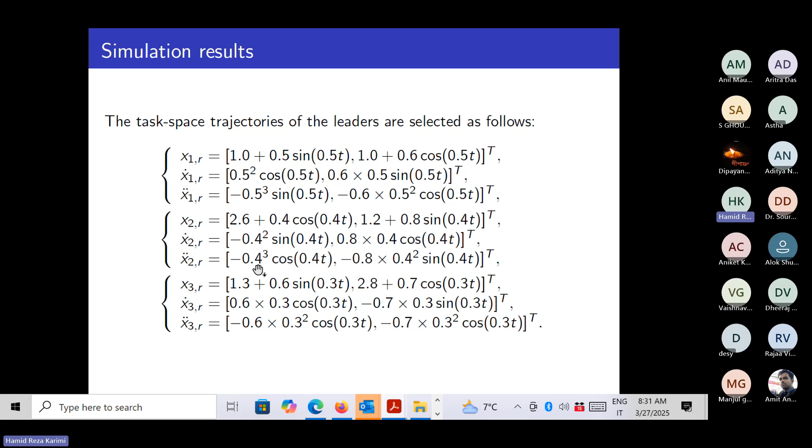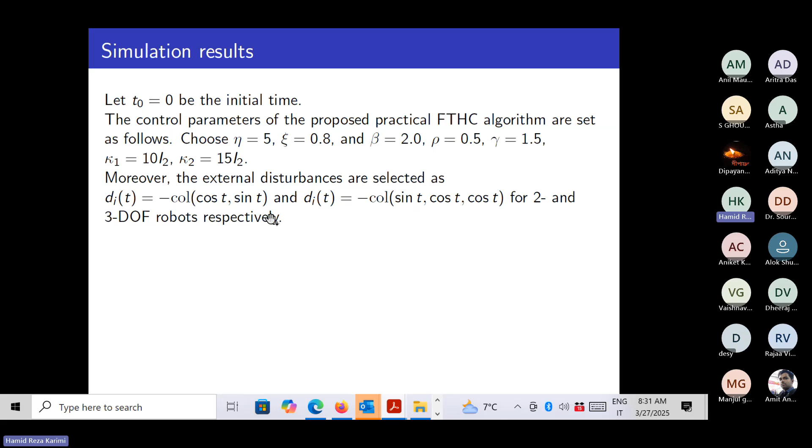You also have the partitioning of the agents into 3 groups, and then you can start to design the finite time hierarchical control based on sliding mode control. Here you need to put some initial values, and also think about some external disturbance. And then you can also add some offset, H1 to H11, basically for the positioning of the formation tracking.

In this case, if we look at this picture, these are the plots for the evolution of xi, the position of agent i minus the offset hi. For agent 1 and also the other agents up to agent 11, you see all the plots for the position, because this is in the xy coordinate. So in the Cartesian coordinate, for the first xi1 and also xi2, so all of them can be followed.

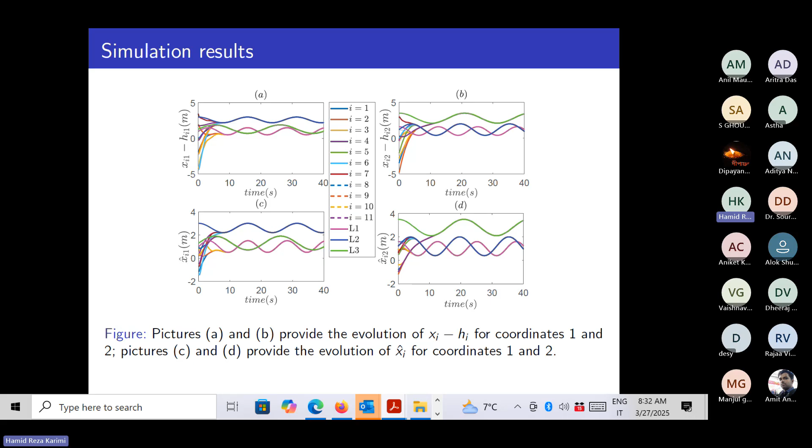You see that all the difference is also bounded, and therefore even for the position and also estimation, there is some sort of fluctuation, which shows that the values of the agent and also estimated values are bounded. So let's look at this slide.

This slide is an error signal because the agent should follow the information of the virtual leaders. Now you can see the error signal in the first coordinate and the second coordinate for all agents from 1 to 11. So all you see is bounded, meaning they are regulated to zero, even if there are some fluctuations here and there. These are also bounded, which means you can prove the boundedness of the formation tracking.

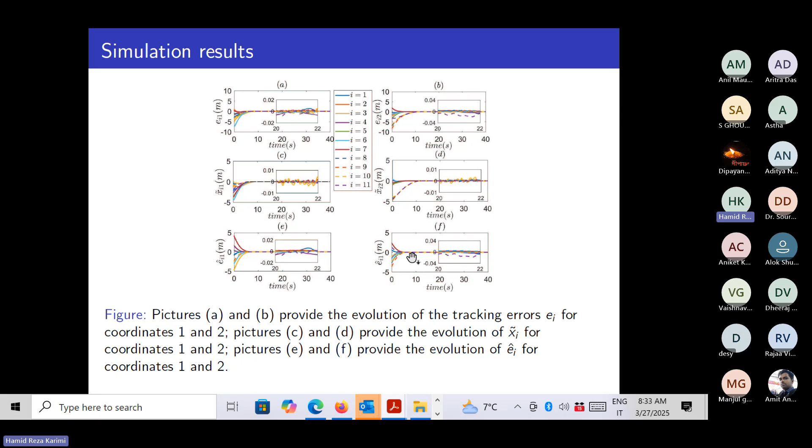And even if we look at the estimation of the error, again you have the same result. It means that the tracking can be satisfied, and also the error is always bounded.

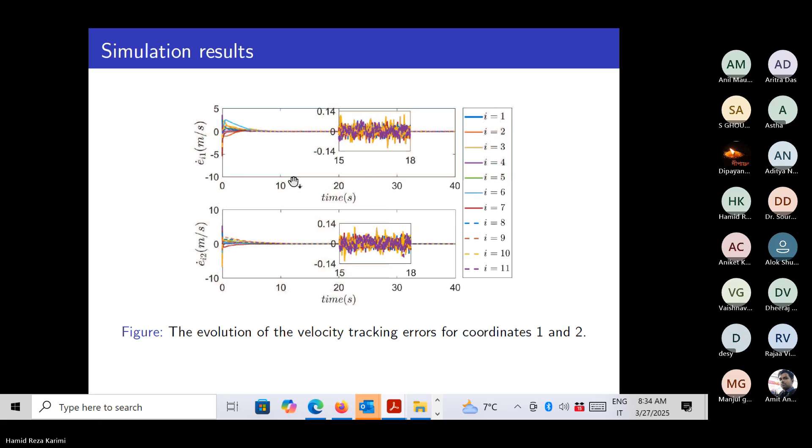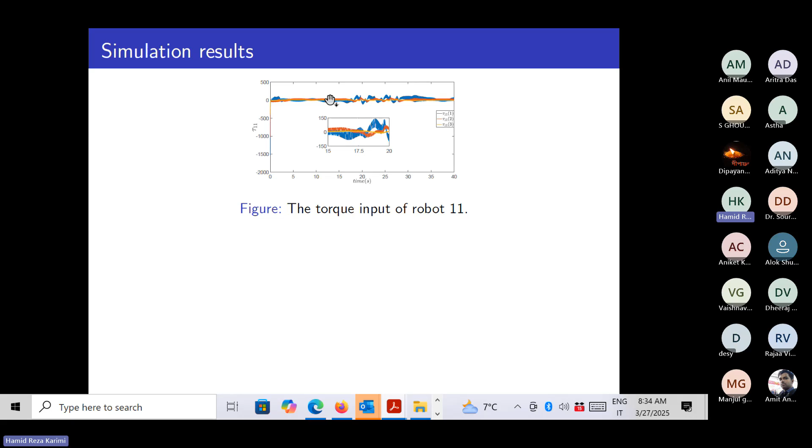So about the control signal, for example, for robot 11, you can see this is the control signal that can be applied in the 3 axes, 1, 2, 3, because robot 11 is a 3-degree-of-freedom robot. So it's 3-DOF, and you can apply the 3 control signals like this. All the control signals have some fluctuation, but they are also bounded.

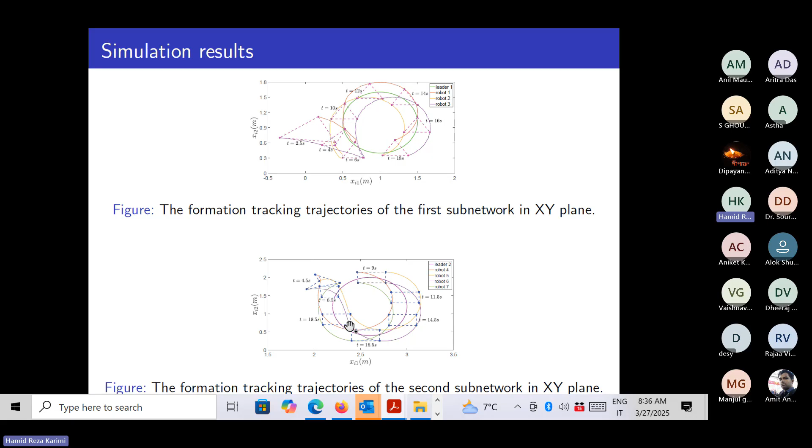So even for this particular case, for agents 4 to 7, they can also follow the information of leader number 2. And you can see that after taking the time, then they come to this square shape. It means that the formation tracking has been satisfied.

So this is for agents 8, 9, 10, 11. You can see that they can follow leader information number 3. And you can see that after evolution over time, they come to this particular shape. Okay, and this is basically what we call the formation tracking.

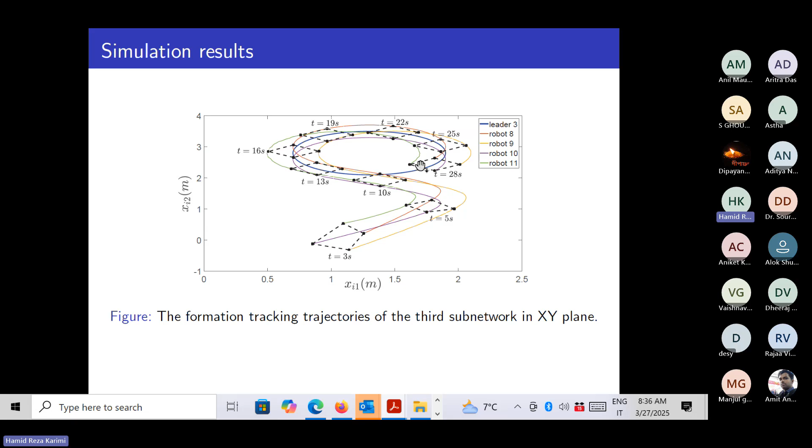Okay, so in this part of the research, I try to introduce the output formation tracking. It's an important part for the networked heterogeneous robotic system. You can design the control in the task space, even if there are some uncertainties, a disturbance, and also based on this shape of the directed graph. So here we can design some advanced control based on the sliding mode control, a sliding mode observer. And then, based on Lyapunov-based techniques, you can satisfy the formation tracking.

Okay, so this was this part, but I can send you this PPT. So if you have any question, you can come ask me now, or maybe later. Do you have any questions, any comments?

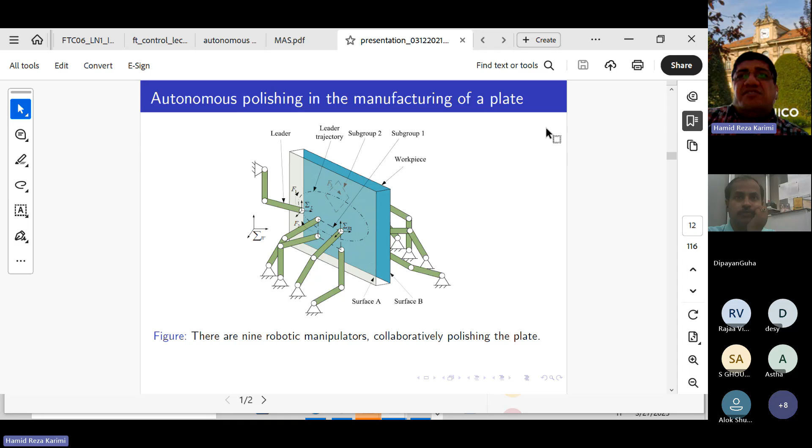Okay, can you see my screen? Yes sir, it is visible. Okay, so in this slide you can see these are the different agents.

Agent number 1, 2, 3, 4, they have partitioned into two parts, part A and part B, and this is leader information. They want to generate the surface, and the robots can collaborate together. To reach zero defect manufacturing, the system should be able to give the right set point, because this leader can give some set point to group number 1 or group number 2. This kind of information is given by the leader, and if the leader gives good information, it means you are able to reach better quality.

The topic of zero defect manufacturing and the topic of multi-formation tracking are somewhat connected, so it's important to understand how to control the agent. This example is autonomous polishing in manufacturing, but it's high-level technology, so you need to remember how to differentiate, how to make a group of agents, how the agents should work together, or how they should compete. These are some topics related to advanced manufacturing.